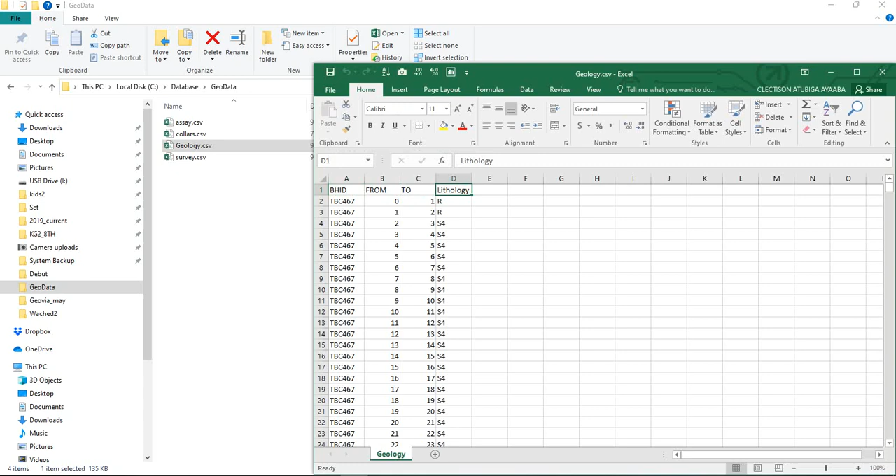You have the geology. Inside geology you have BHID from to lithology or the geology, the rock type, whichever you call it.

And we have the surveys. Inside survey we have hole ID, BHID at bearing or azimuth. In Surpac you say azimuth and then dip.

So launch Datamine, new project. From a new project, click on next.

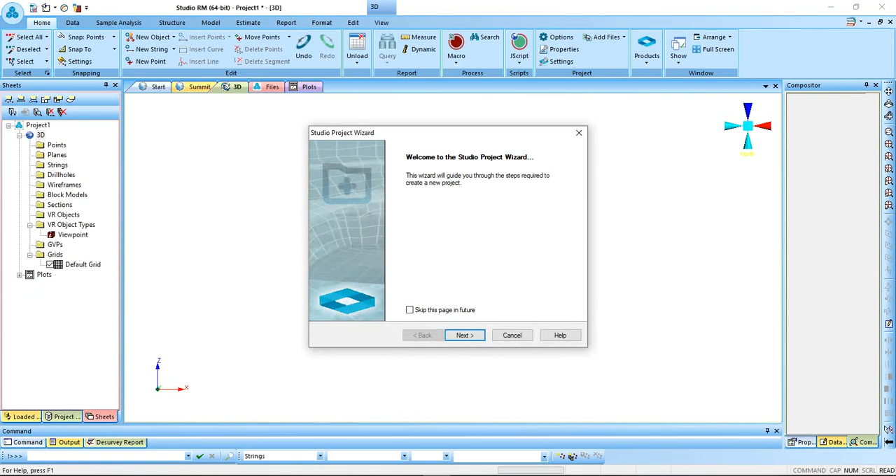Give your project name. I want to name it geodata as I name it in the database folder. I'll browse for that folder and the database geodata. Okay,

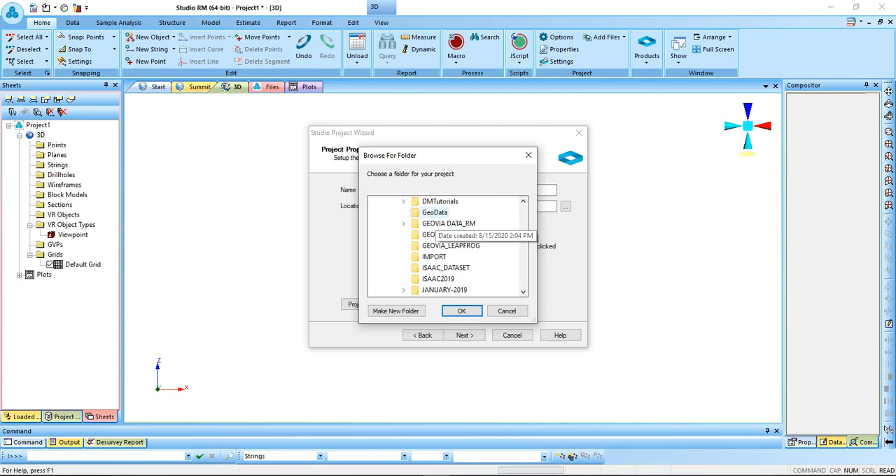next. These are my CSVs. Next, finish.

Okay, so we've created the project geodata. So come to data, import to project. You are importing the data into this project.

So click on that. On the drivers category, I'm going to choose text. On the data type, I'm going to choose tables. Then I'll OK.

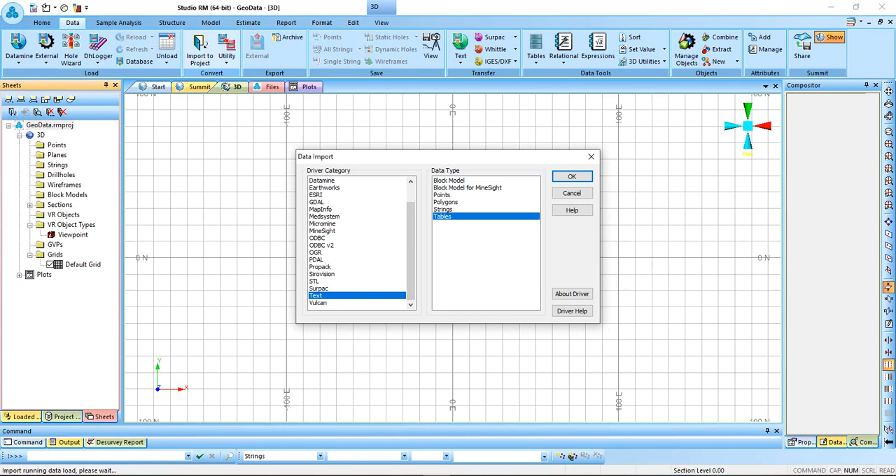Make sure I'm directed to the folder that I store my CSVs. Pick collar, plot. Make sure that it is starting at line 1.

Make sure that the header is row. Next. Next. Finished.

Come to text. I want to store it as collar. Next.

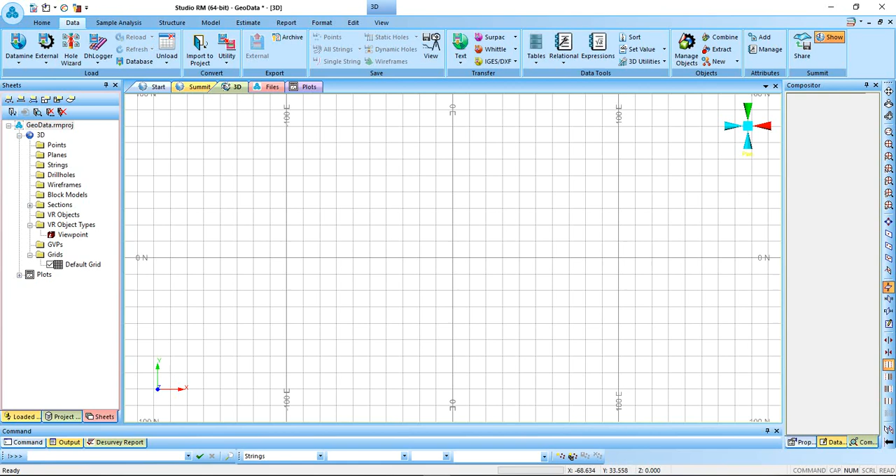Come back to data, import to project, text tables. Select assay.

Next, the same format, header row, start at line 1. Next, comma delimited. Next, numeric. This should be alphanumeric. Finished. I want it to remain as is.

Okay. Same format, data, import to project. I'll go for geology.

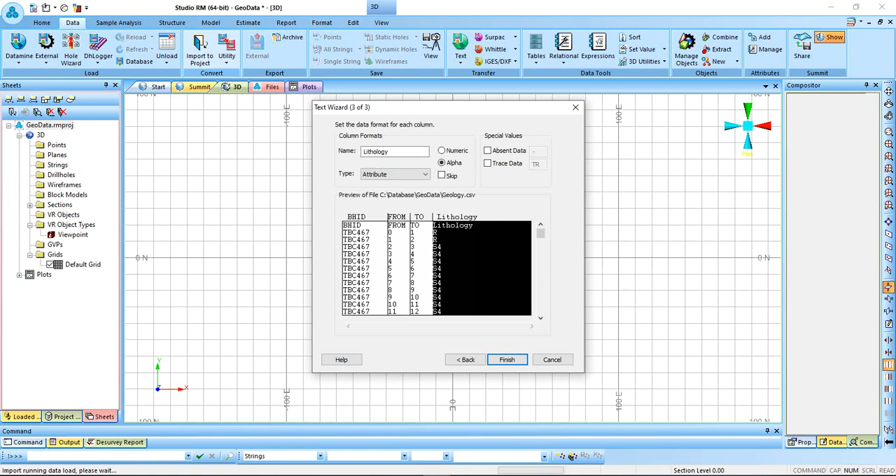Start at line 1, header. Next is comma delimited. Next, this is alpha, numeric alpha. Finished. I want it geology.

Okay. Same format, data, import to project. Next, last one is survey. Open.

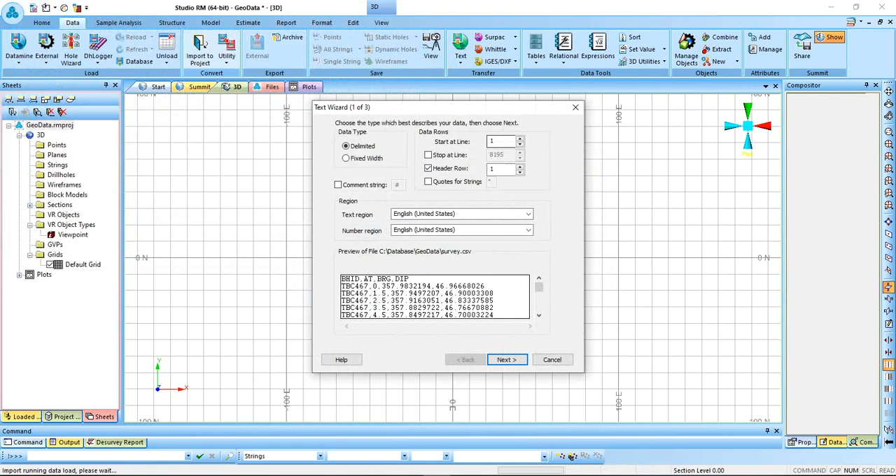Next, next. Alpha, numeric. Finished. I want it to remain as survey.

Next. So the data, your CSVs has been imported, and these are the folders Datamine automatically creates for you. So the assay, we have two samples, geology and assays and geology, and we have the collar, we have the downhole surveys. So these are your data.

So the next thing is to run your HOLES3D. You can either type HOLES3D, you enter to get this form, or you come to sample analysis,

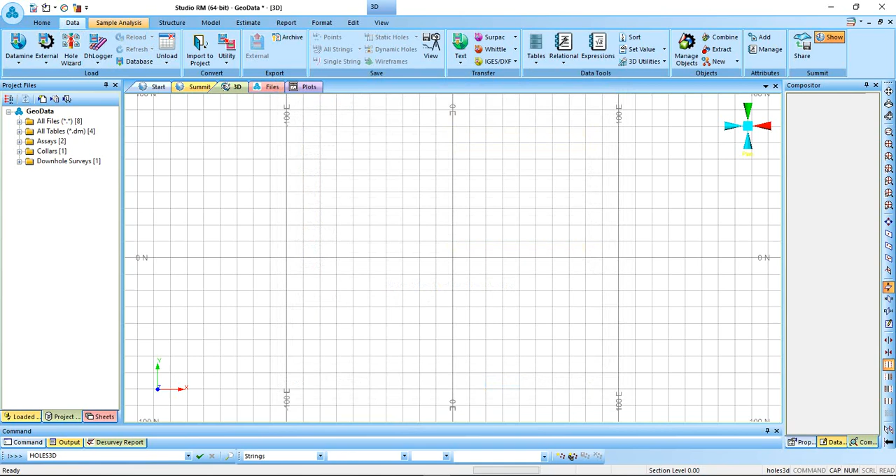Desurvey static drill holes. You click on it, it's the same format as drill hole 3D, like using the buttons.

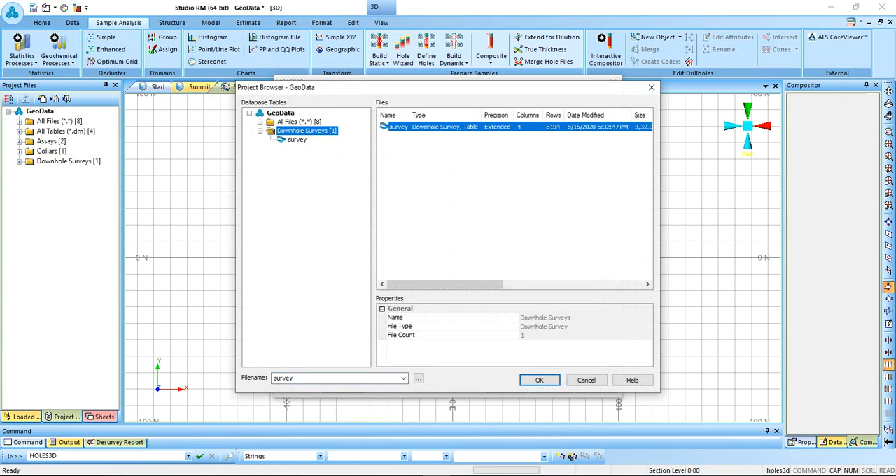Browse your collar, select it, survey, select it. Sample 1 is compulsory, collar is also compulsory.

Sample 1 is assay, select it. Sample 2, geology, select it. If I have mineralization, I can go on anything that is needed to be added. I can go on and on to select those ones.

Of course, you have your output file, that will be the DH, the drill hole file. Here, the summary, which will give you records of the input drill holes.

You'll be able to know anything that is missing there, whatever is lacking. It gives you a brief summary of the drill holes you have imported.

So I just put holes MRY, hole summary. Any error detected during the desurvey process will also be put in the error folder. So I just put holes error.

This makes sure that everything conforms. Hole ID, X collar, everything. By default, they should conform.

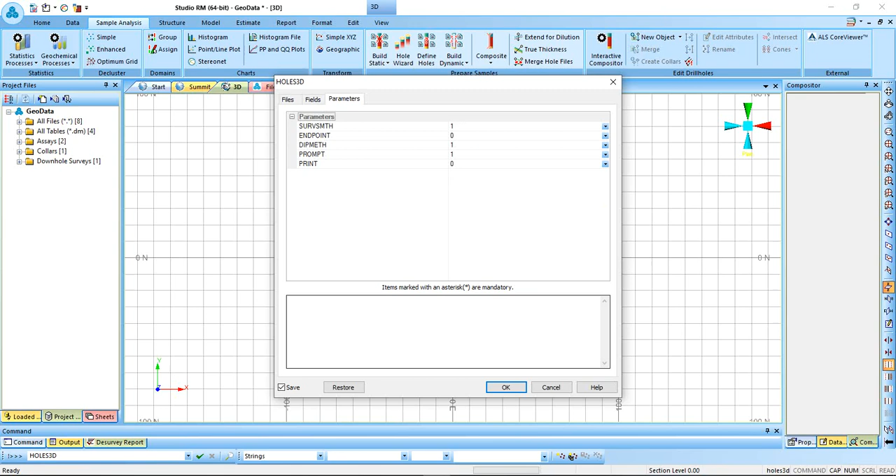You should have the same parameter. That is, this should be inside your CSV files. So you click OK, so that the desurvey will begin.

We see our drill hole file created here. Yeah, so that's our drill hole file. Desurvey has been completed.

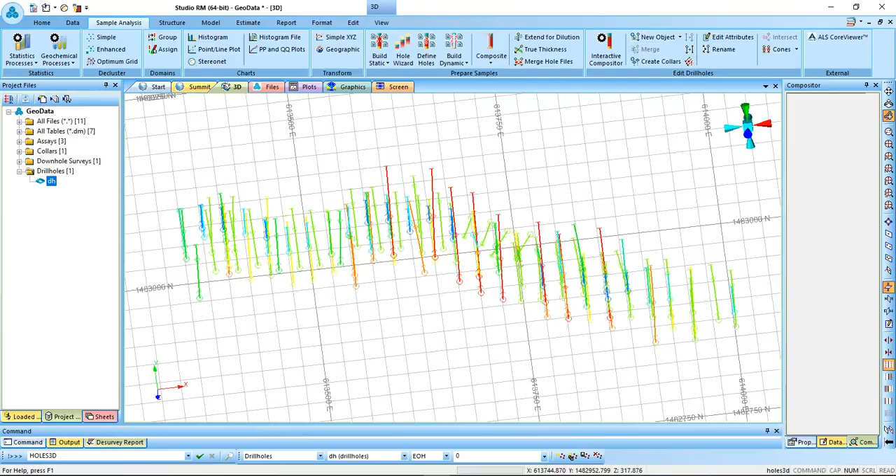So you can use this pin view to pin, see how your drill holes look like, and look at it in plan view, section, north, east, south, west.

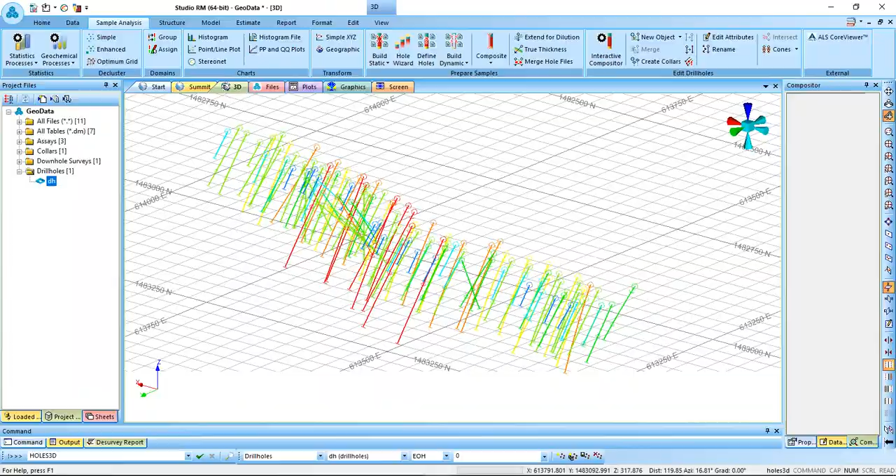Okay, so you want to color code your drill holes, maybe do some labeling for the gold grade, and then maybe you can label the EOH and the collar. Come to sheets, come to drill holes, I'll click on it,

come to lines and symbols, select a legend. I will take you through how to create a legend later. Select your gold.

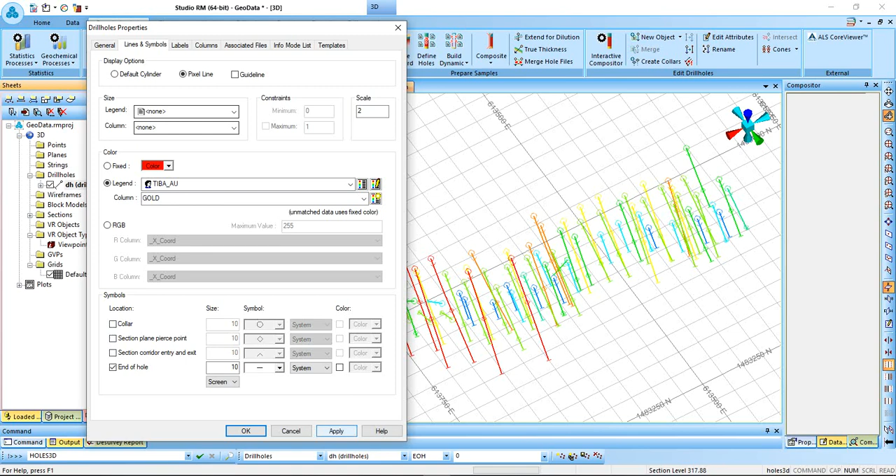I don't want these collar and EOH those, so I'm going to untick them, leave my drill holes clean, to view, apply.

Then this is my legend. This is my legend. So this is how our drill holes look like.

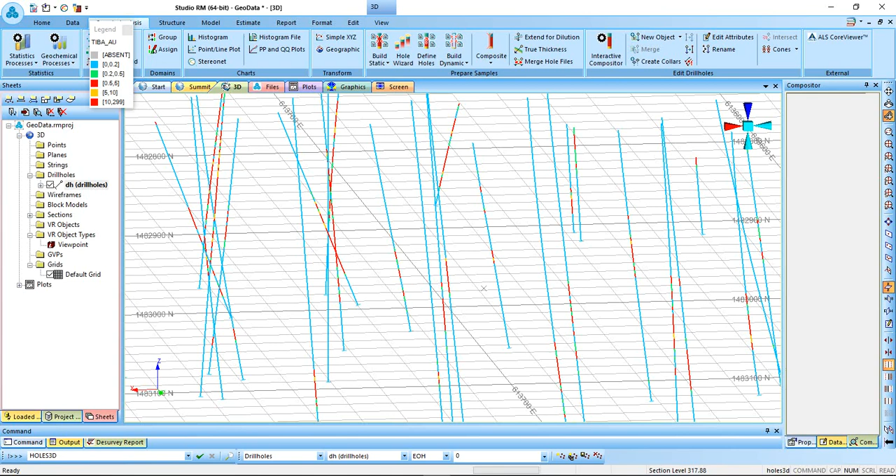0 to 0.2 is a cyan, 0.2 to 0.5 is a green, 0.5 to 5 is yellow, 5 to 10 is orange, 10 to the last bit is also red.

You can change it, you can edit them if you wish. Just click here, let me edit them here if you wish. Well, I can change this color because I have red already.

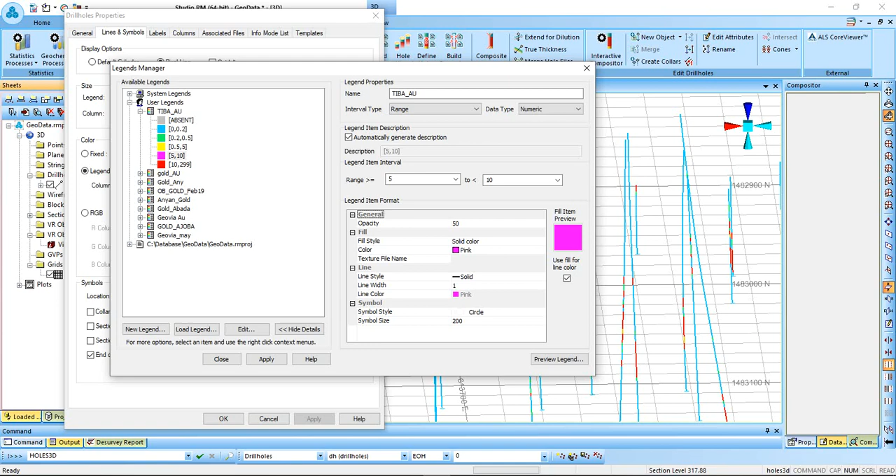I can give it, let me give it yellow. Give it yellow. Yellow is similar to this color, so I'll give this one magenta. Yeah, so close.

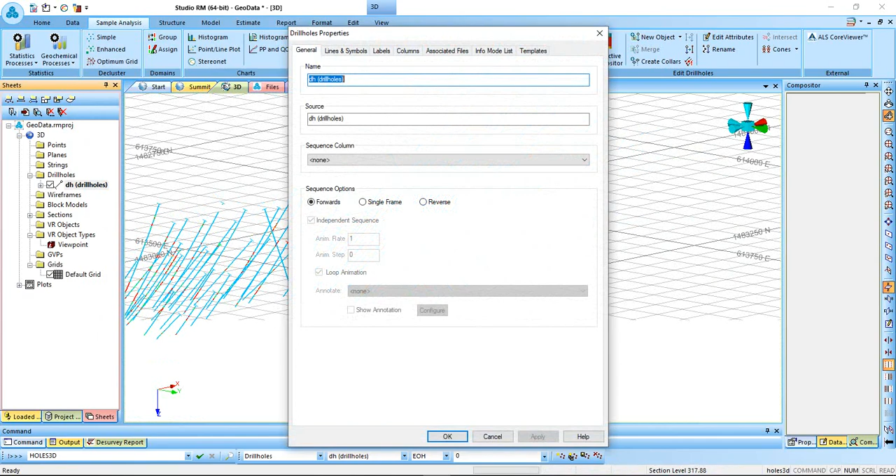You can go back there. Another display option lets you put it in a cylinder format. This is the cylinder format. I reduce the scale to 1. This is the cylinder format.

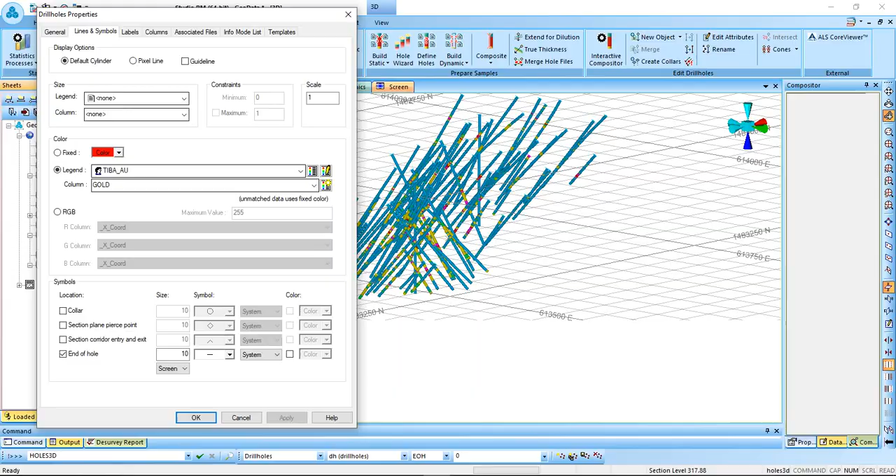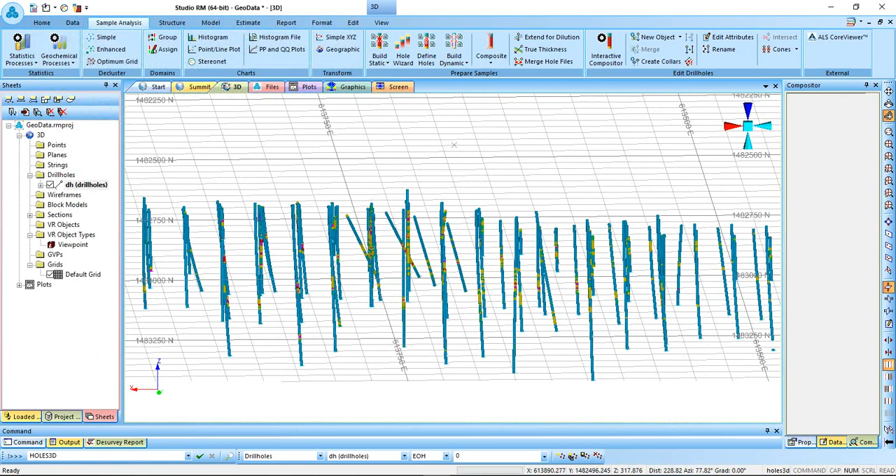You can label the BHIDs and then label the gold grades. Double click, get back there, go to label, click on display label. By default you have the BHIDs.

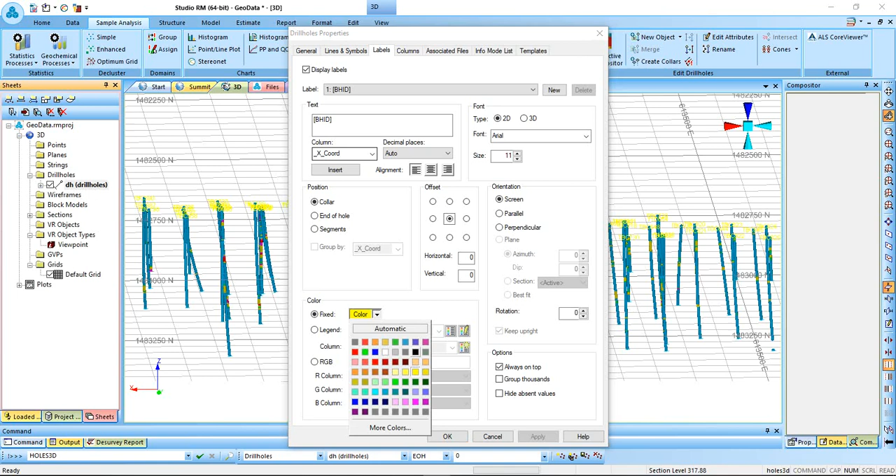I have yellow, I want black. This is the BHIDs. I can label the gold grades as text.

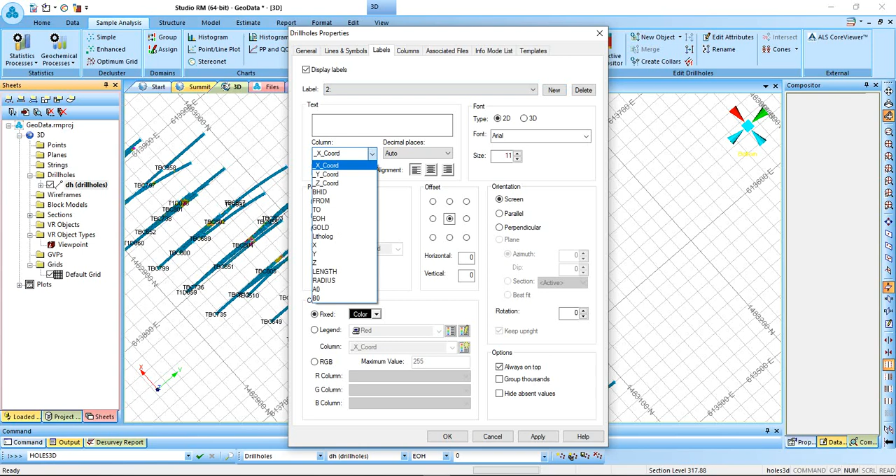Go back there, label. The first label is the BHID. Click on new, select gold, insert.

I want to label them perpendicular. I want them to appear perpendicular. I want them to be grouped by gold. I don't want this.

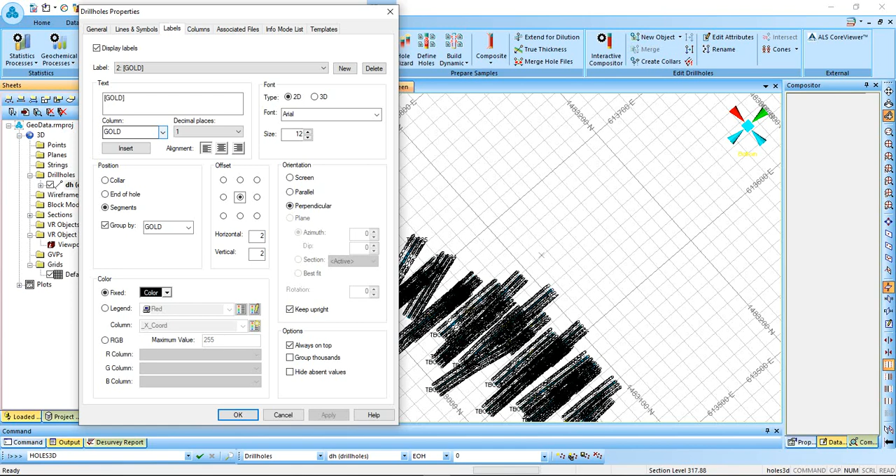Let me choose one on the decimal place. Let me set font size to be 12, and the offsets. Let me put this. Let's see. Fixed, choose here, select legend.

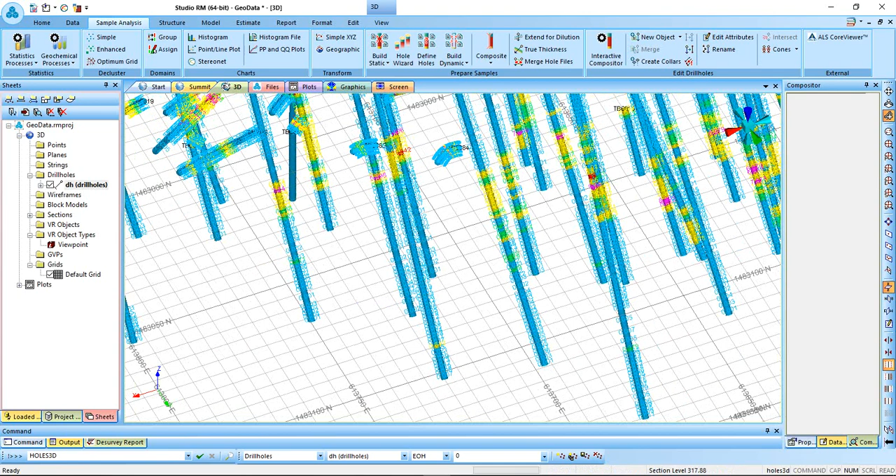That's how a drill hole looks like. Go back there. Label. Yeah, so you just play with it.

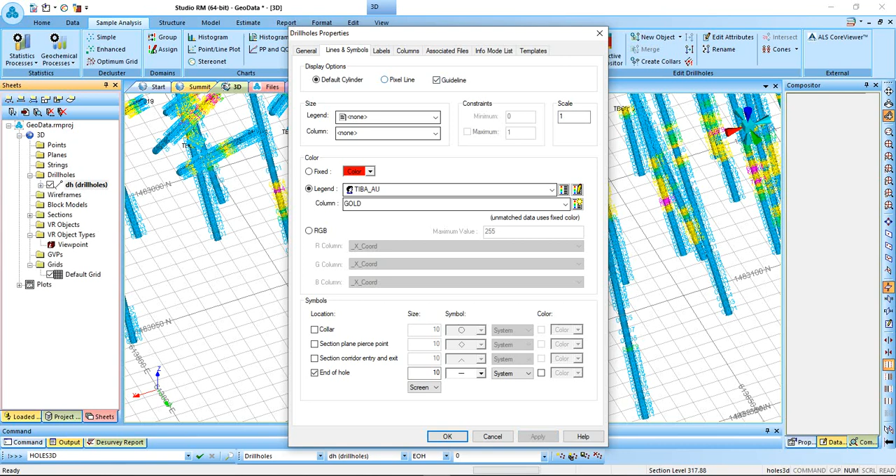Can select guide. You can as well do this.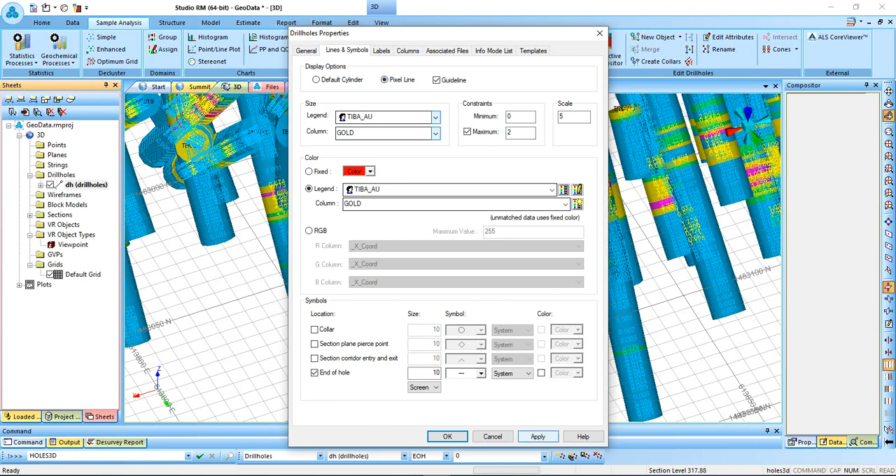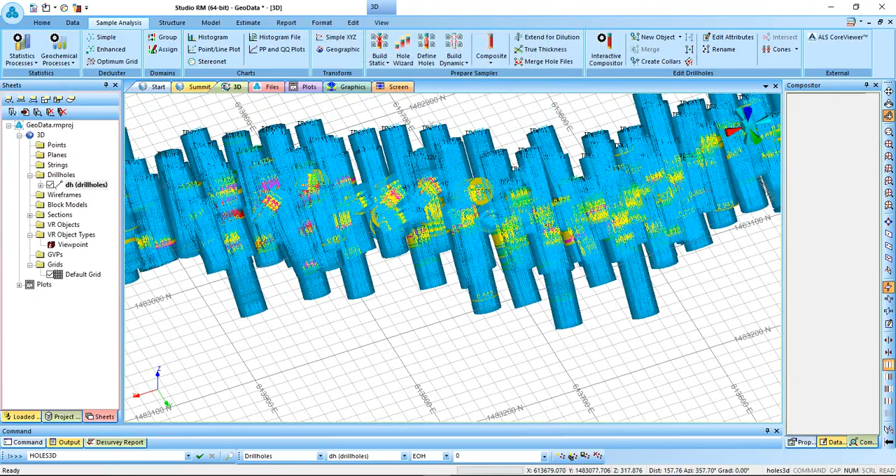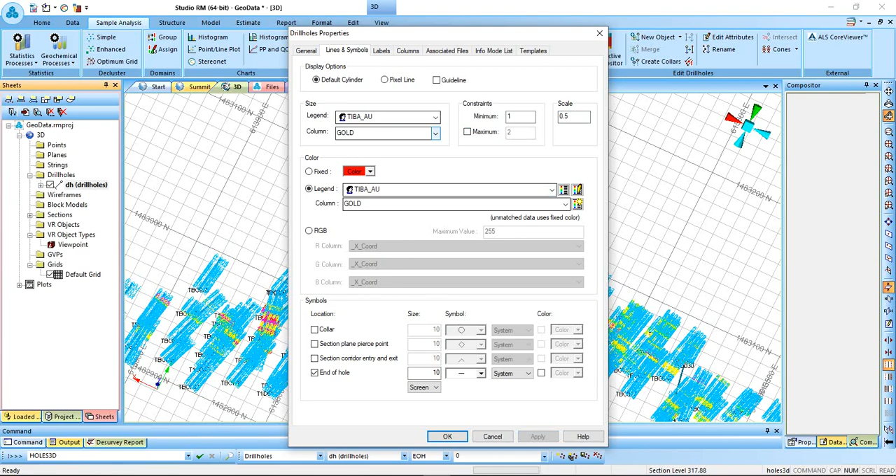So that is that. It's too big, we reduce the size. It is 0.5. Okay.

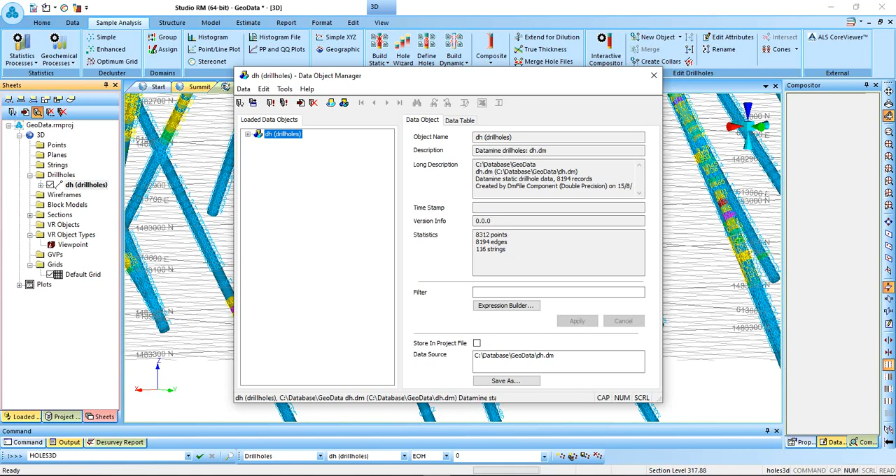I want to filter the waste away, so I go to this guy, data object manager. Make sure your drill hole is highlighted. Come to expression builder, double click on gold, greater than or equal to, assuming my cutoff is 0.4, so 0.4.

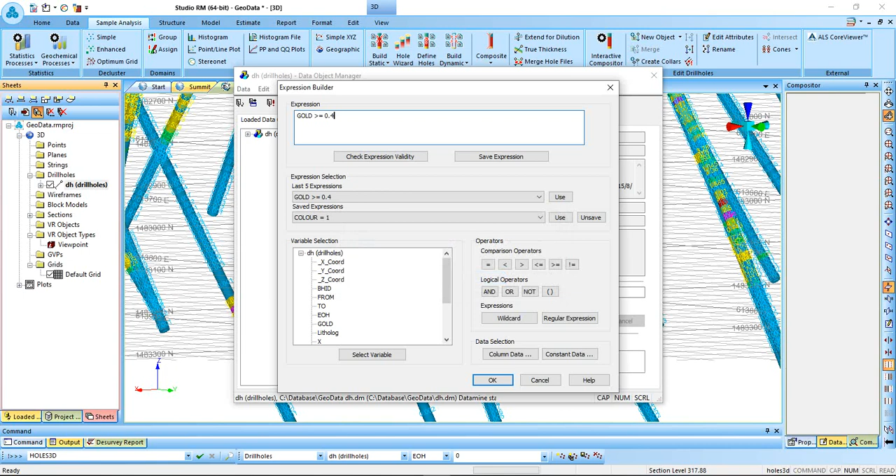Check validity, the expression is valid. If it is not valid, Datamine will tell you. For example, let me add something like this. It's not valid, the current expression is not valid. Will you like to revert to the previous text? Yes. That's apply. Apply.

Close this window. So you see that the waste is gone. What is left is ore.

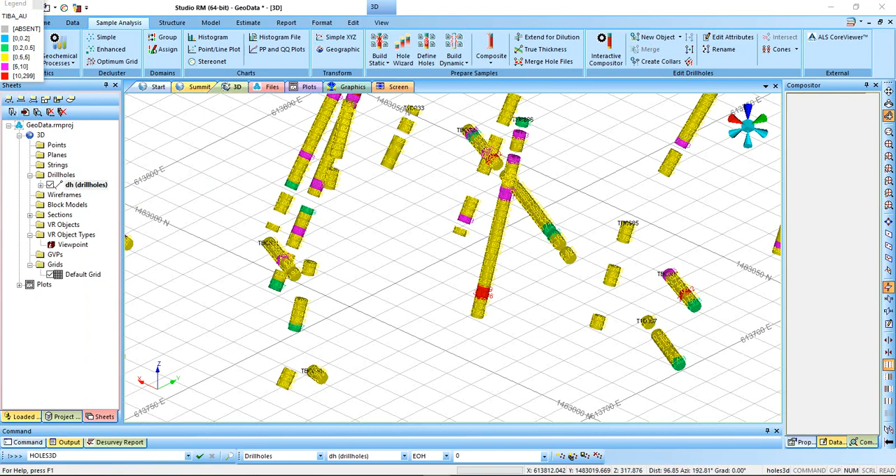I can right click this data and go to display legend. So you see that the 0 to 0.2 is gone. So 0.2 to the last one is what we are seeing here.

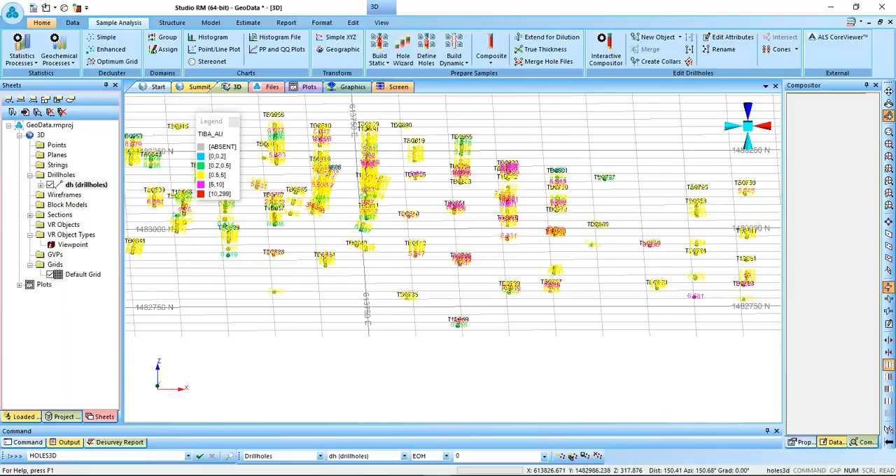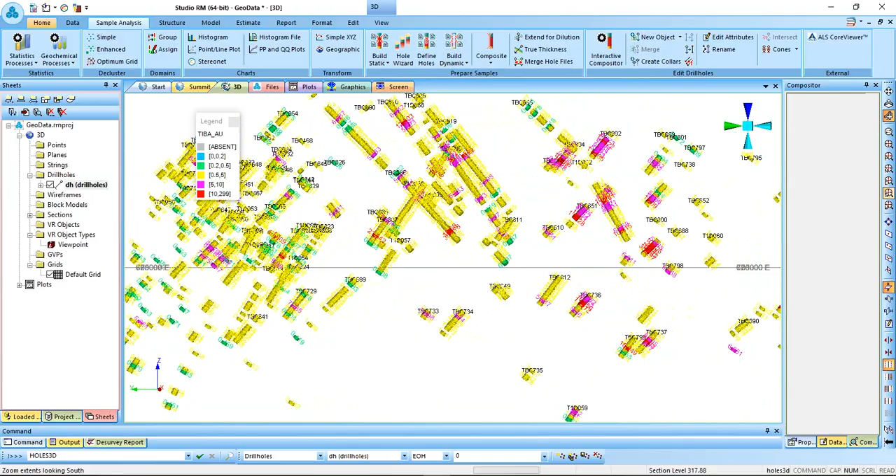So plan view, looking north, looking east, south, west. Okay.

I'm going back there to undo them. Let's clean this expression builder. Apply.

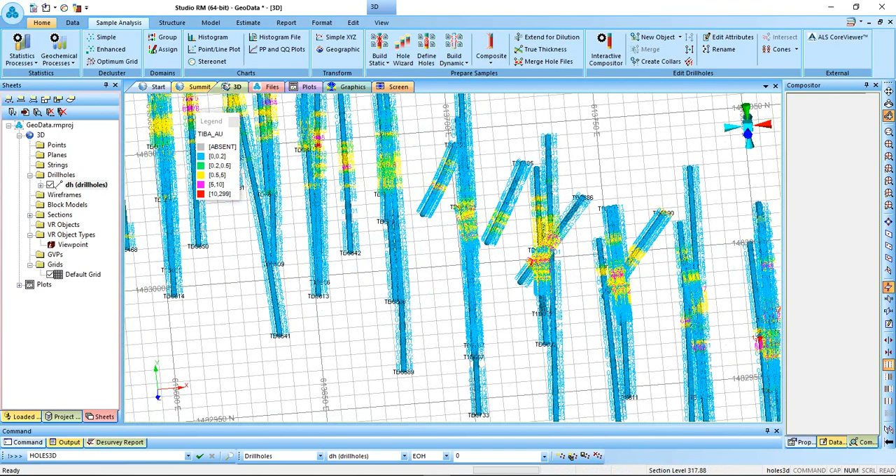I don't want to, since I'm going to section them, I don't want to see these labels. So I'll go back there. Come to labels, select bold. Delete it, then apply. They've gone.

Then this is plan view. I want to section my drill hole. So use this plan view. Move this to the plane that you want to section. And you can make sure that the drill holes are snapping to the width.

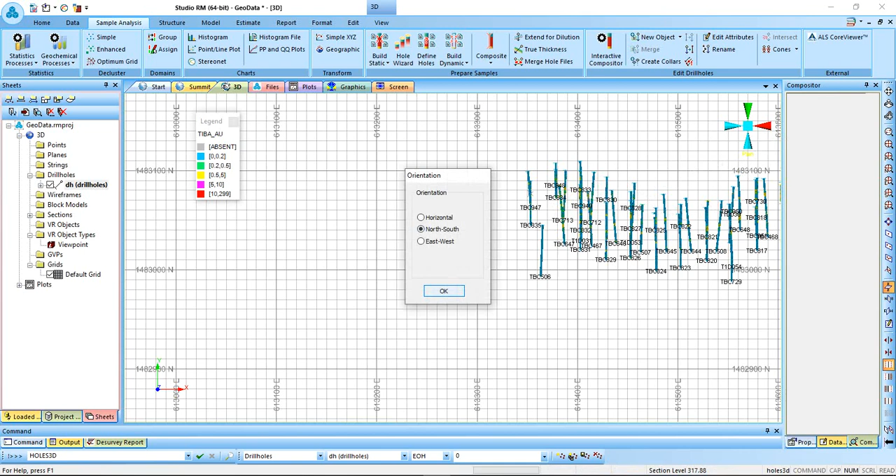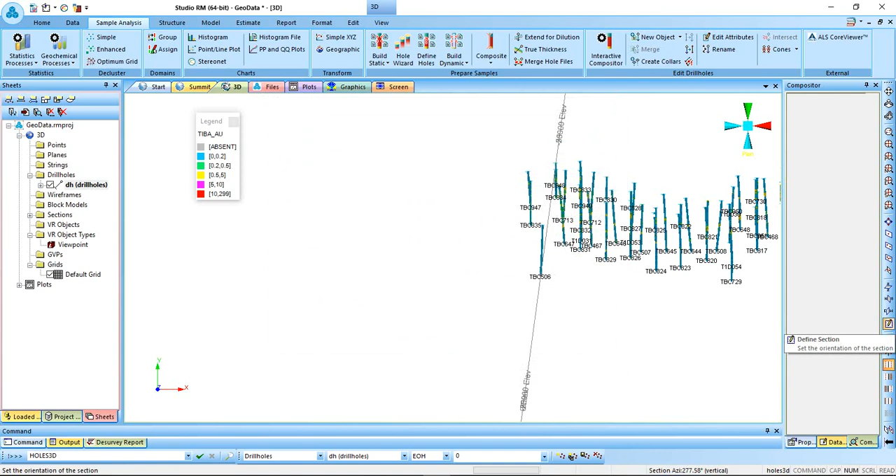So I want to set the orientation. North south is 90-90. Before doing this, you must know your drill hole spacing. The drill hole spacing for this particular project is 25, at least 25.

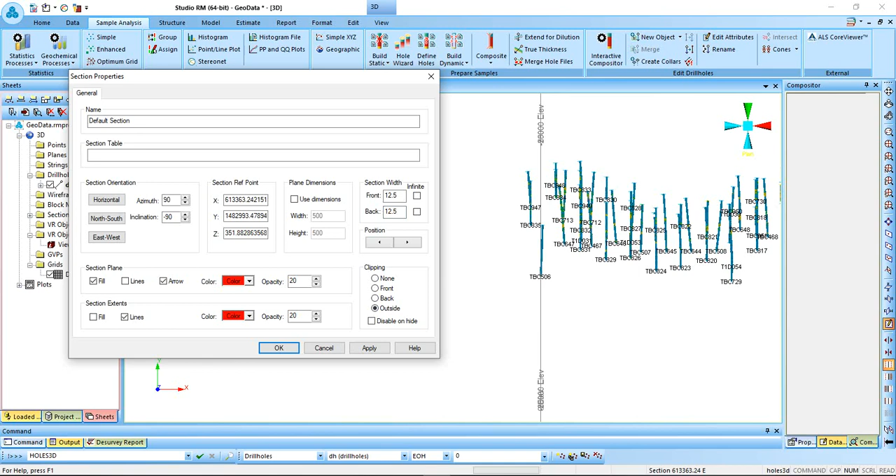So I'm going to put 12.5, half of the drill hole spacing, front 12.5 then backward. I'm going to set the clipping outside. You can only apply to see the effects. Okay.

Then come to view, align view. This is your first section that you form, your segment, if you want to do your modeling for it.

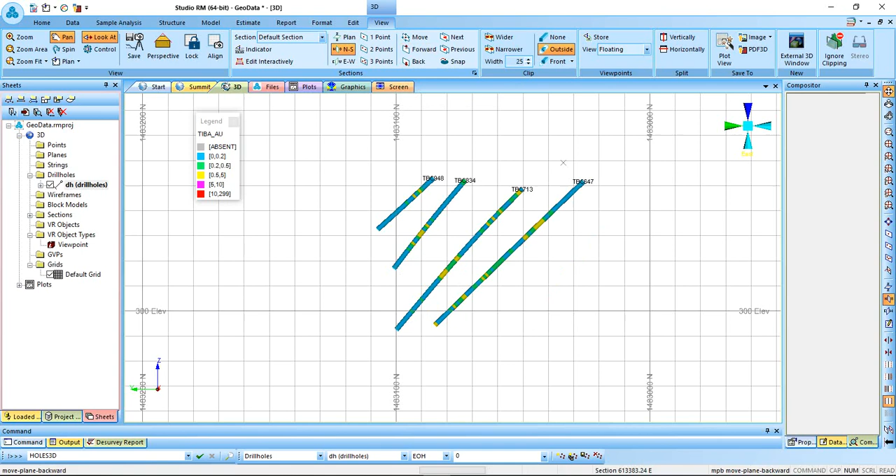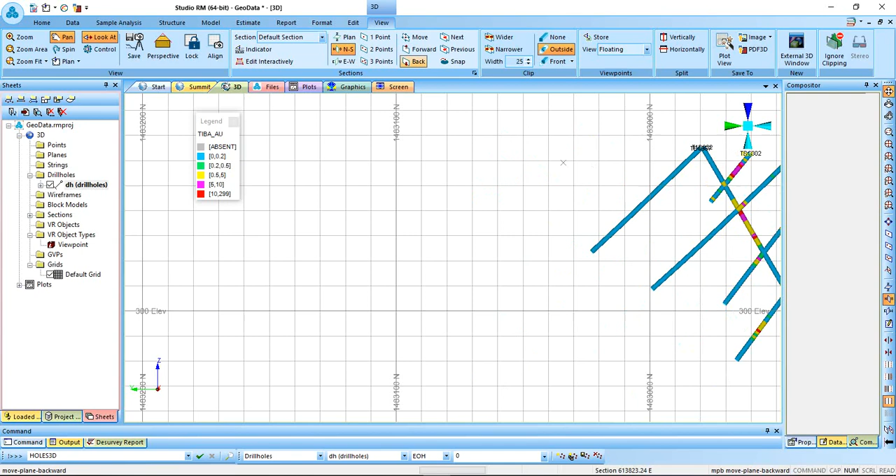I can use this, I can use the pan view to move our section.

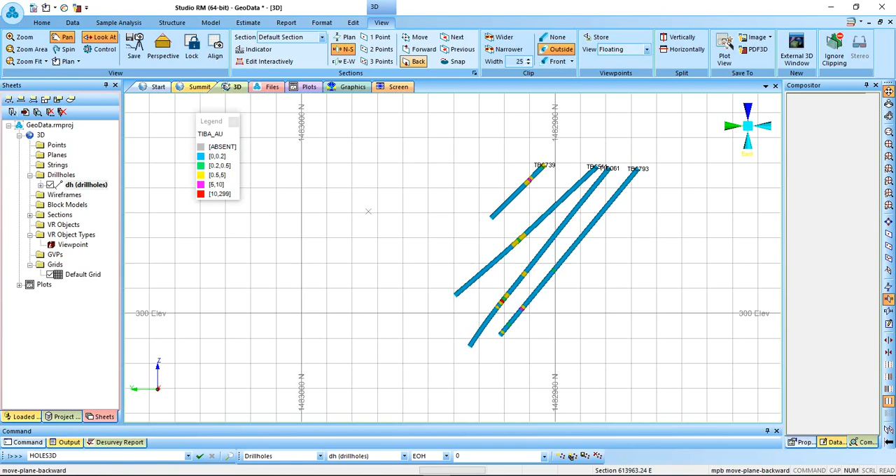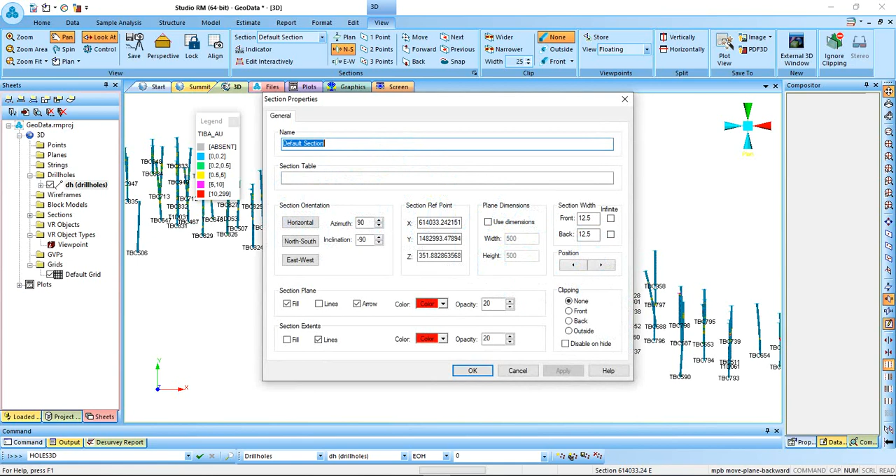Enough section. Click here, turn off clipping. Now go back to plan view. If you want the grid line, go to section definition, horizontal. Okay, back to your normal position.

So I'm going to do the same thing on other softwares like Leapfrog, Surpac, Snowden Supervisor. So if you're a beginner, you want to learn how to do modeling, in fact, up to even advanced geostatistics, whereby you model data, do variograms, and come out with your estimations.